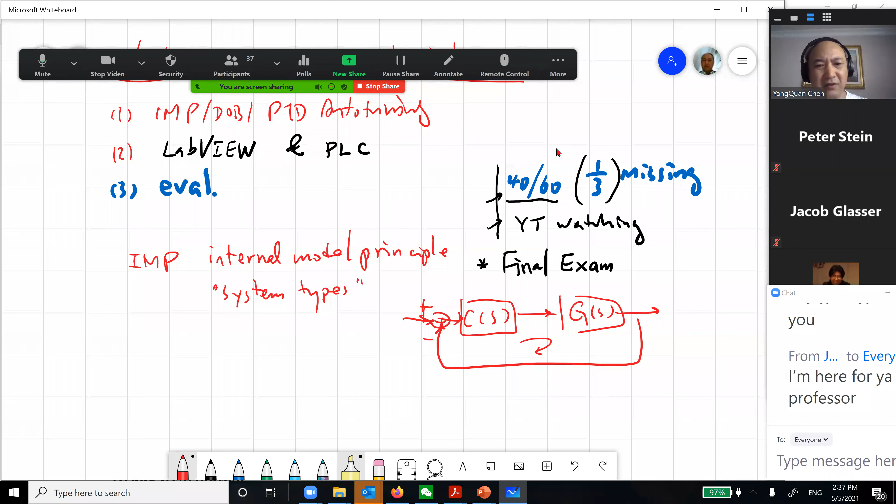So if I don't have an integrator inside here, the transfer function in this loop - the loop transfer function is C times G - then I can write a numerator and a denominator. If the denominator doesn't have an S, then when you have a step input, you have a response, so you have an error here. This is your error steady state, the error when t goes to infinity - it will not be 0 if you don't have this.

So this is called system types - system type, so like S to the power of r. So r equals 0 is type 0, r equals 1 is type 1.

Type 1 means you have an integrator within the loop. When you have an integrator in the loop, the steady state error will be 0 for sure. That's called the system type principle. This is only for a step signal, and this is because you have S in here, so you need a type in here.

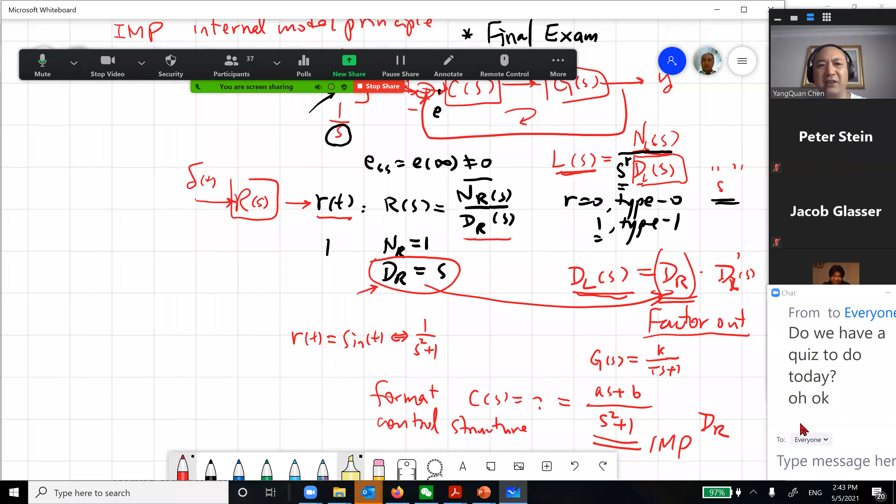So we did the first one, and now I'm going to talk about DOB. You have learned this before, there's a week 11 lecture recorded, I only did a 45 minute talk. We talked about 3 things in that lecture: one is IMP, and Youla parameterization.

And we talked about Smith's predictor, right? In the Smith's predictor part, we did CGE minus LS and 1 plus CGE minus LS. We figured out a magic way to simply pull out this thing, so the delay will not affect my stability anymore.

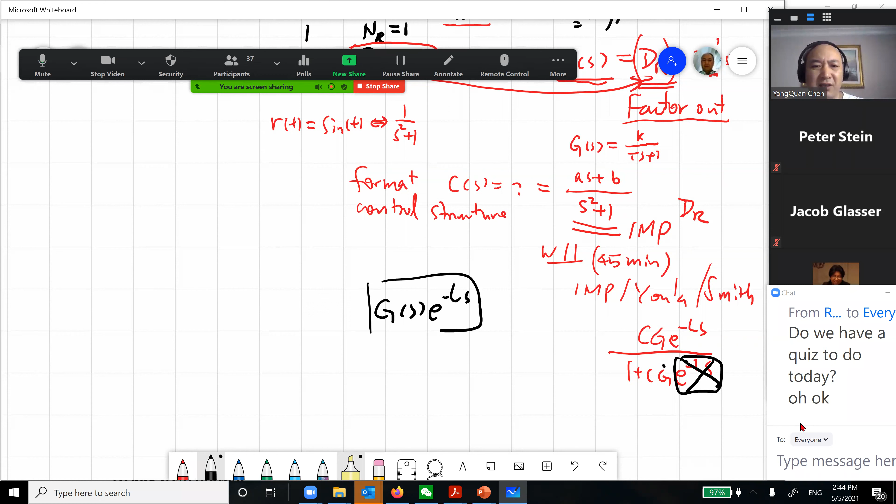So the transfer function, it's like you have G in here, you have minus S in here, and you have a controller in here. So if you do this feedback control, then your closed loop system is CGE, this one and this one, right?

No question about it. The Smith predictor is to give you an idea, say, let's do this way. So then you have G of S, here you have 1 minus E minus LS. You do this way, and you do this one, it's minus. So this is a Smith predictor. By doing this kind of feedback, the closed loop system will only be like CG over 1 plus CG times E minus LS.

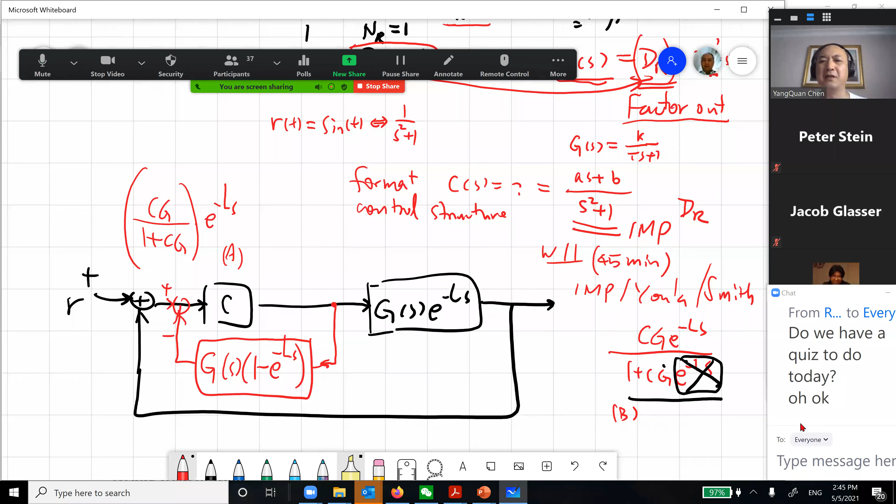Isn't this like magic? Compare this B versus A, it's different, right? So that's the beautiful side of Smith's predictor.

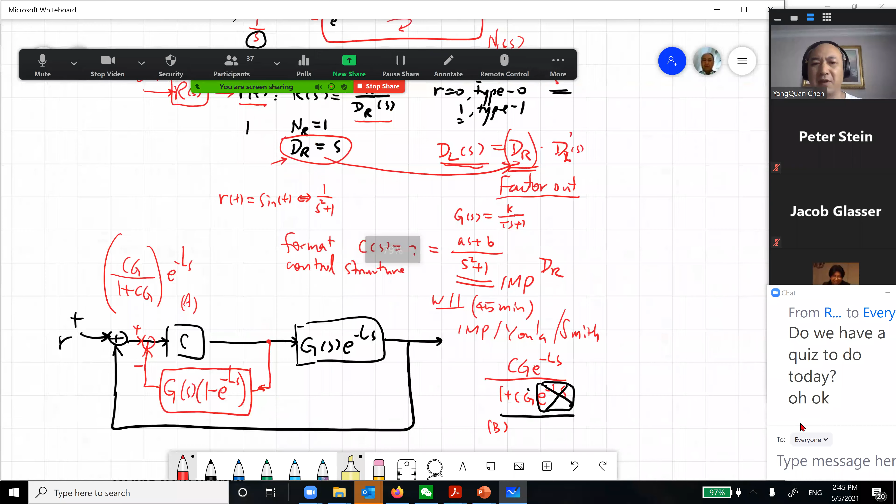So the reason why we call it Smith's predictor is from a physics point of view, Y is measurable. So U is available, Y is measurable. So G E to the minus LS times U is Y, this is all physically available signals. However, G of S times U, this is U, then you have GS times U, that is actually Y E to the LS.

LS is future, minus LS is past, it's delay. So how is this physically possible? That's why we call this predictive: you measure the Y, and then do a prediction. You get this Y, you need to predict what is T plus L. So that's why it's predictive control. In this expression, G e^(-LS) times U is Y, and this is measurable, but G times U is not measurable, it's by prediction. That's why it's called predictive control.

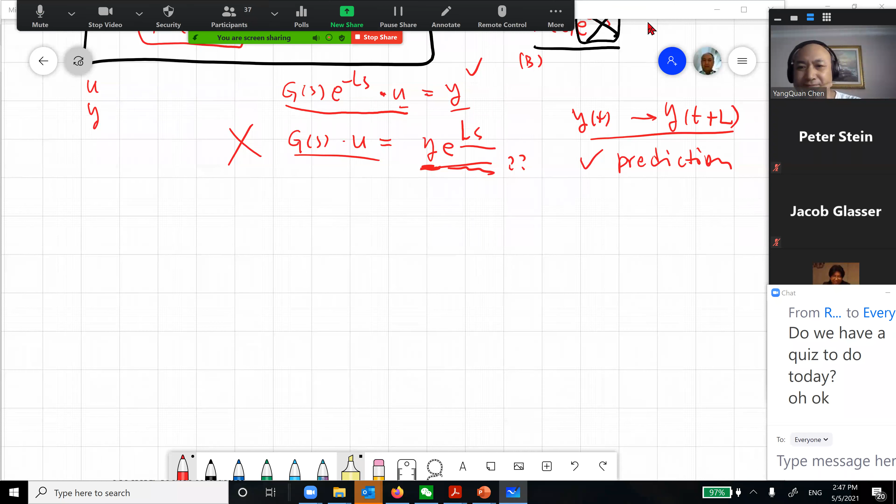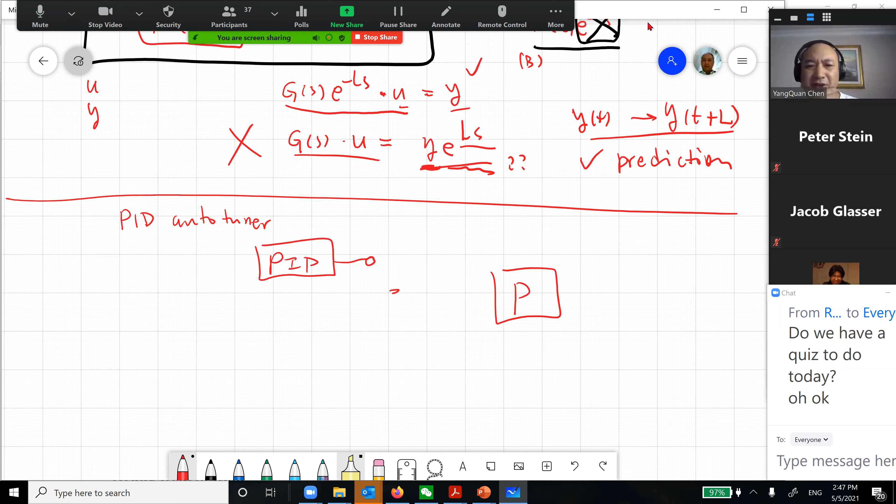So I'm going to do a PID Autotuner. Basically you have a PID control, you have a plant, you have a PID control, you want to do PID control. So you have something here, you do this, you do this, you do this.

So this is traditional PID control, but from time to time you probably say, oh, I need to do retuning of the PID. How do I do that? What they do is they put a relay element in here. You turn the switch here to here, so this is switched to here, then you have a feedback. This is called a relay feedback experiment.

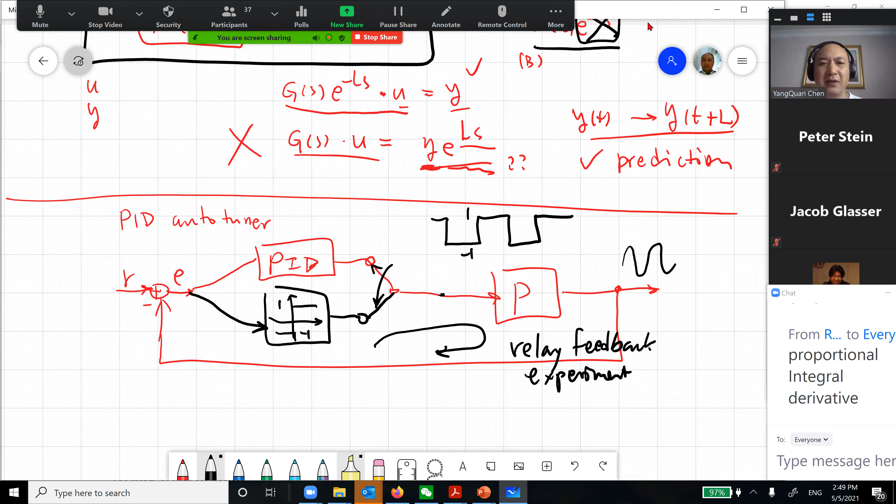By doing that, you are going to see your output will have oscillation, while the input here is like a square wave, only one or minus one. So then you can measure what is the PU, the ultimate period. You can measure the ratio between the output here divided by 2. So this is peak-to-peak amplitude, A divided by 2. This, 1 minus 1, is 2, so the magnitude is 2, and this magnitude is A. A divided by 2 is the ratio.

So with this ratio, with this PU, you are going to use the Ziegler-Nichols tuning table to decide your K, TI, and TD. Again, the PID, when we say PID, we should use this one: it's K overall, times E, plus 1 over TI times the integral of E dt, plus TD times dE/dt.

So why is this always true? Because this is time, so overall this has the unit like E. This dE/dt has time divided by time, so this is still E. Unit E, so add all this unit E together, then you multiply by K. That's why you use this form in industry all the time. But in the textbook, many people say, oh, I do KP*E, KI times integration of E, and KD times E dot. Is this okay? Yes, it's okay, you can interchange it. But in that case, this KD, KI should have units, and in the other form this one can be unitless, but this one will carry different units. Otherwise you cannot just add variables with different physical units together.

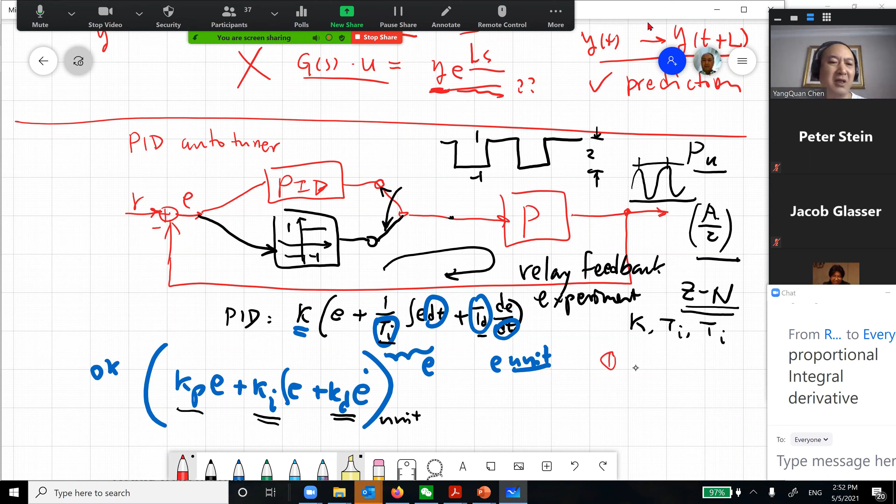But how do you decide all these parameters? You're using Ziegler-Nichols. Using Ziegler-Nichols is based on what information? So we did two methods: one is called a reaction curve, also known as Cohen-Coon, and another one is called ultimate oscillation.

This means you do a proportional feedback control and push the gain to a point where the system will start to oscillate, and that will damage the system. So you use relay feedback instead, so your input signal is always limited like this, so you're not going to damage the system. The system will have oscillation, but be careful, you need the formula to convert this to the ultimate gain. I think we covered this part already. So this is like a second method, called the relay feedback experiment.

Because the relay feedback experiment is safe and widely used in industry, it can be configured inside the controller. You have different modes: a tuning mode and an operational mode. So if you feel the system is not functioning satisfactorily, fine, let's switch to here and let it run, then we can automatically check and retune the PID.

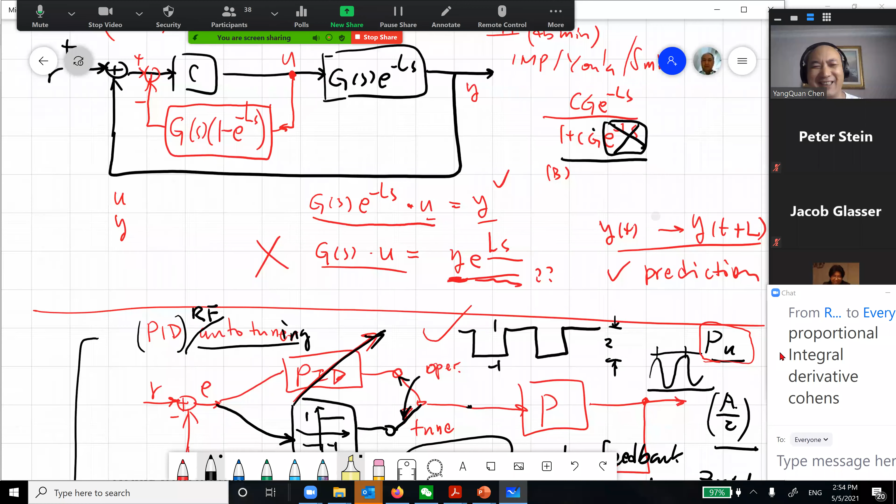So here's the DOB. Actually, if you go to industry, you are going to see this idea a lot. Let me give you an example. So you have a plant in here.

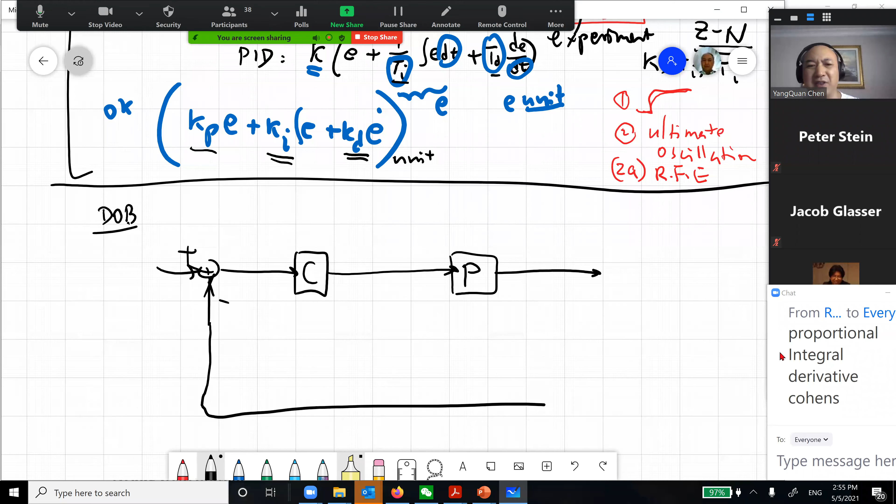And you have a controller, okay. Yes, everything is running, but sometimes you start to see something - this is a disturbance. This D will make your system very bad. So how can I cancel out this D?

One of the ideas is you buy a sensor here, measure it, go through some sort of filter, then you add in here, or adding here. You add in here, that's physically connected. Then hopefully you can cancel it.

But this one needs extra money to measure it. And most importantly, even if you have money to buy a sensor, in reality there's no way you can put it in to measure it. So you cannot - it's not possible to measure. It's not just a matter of money.

Suppose you cannot do anything here - this takes money, and also physics will not allow it. So what are you going to do? You still have this one here. Say for example, you have a

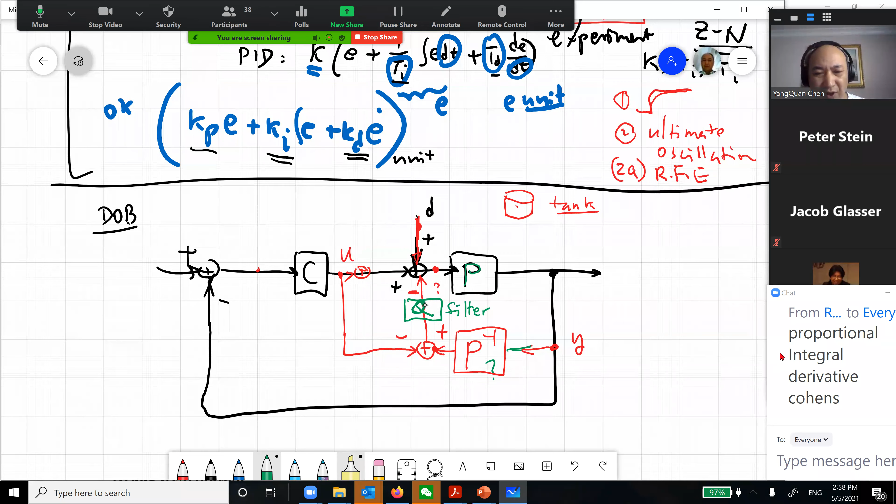But remember, if you put Q in here, it's the same as you put Q in, like this. So you have C in here, you have D in here, you have P in here. So what I'm trying to say is you have U in here, you go to Q, you also go to a Q.

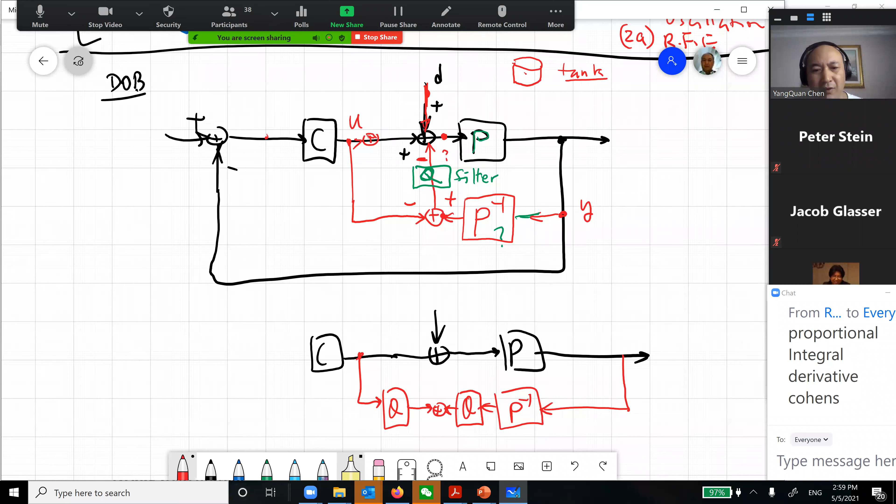So then this is D hat, this is D, they can minus it. It's the same - you have a Q in here, you can push the Q inside. So you should have a Q in here and a Q in here, right? It's the same.

But this is more realistic because you have a control signal that goes through a low pass filter here. Say for example, it's 1 over tau s plus 1. So you get this signal. This is totally reasonable - you filter this signal, right?

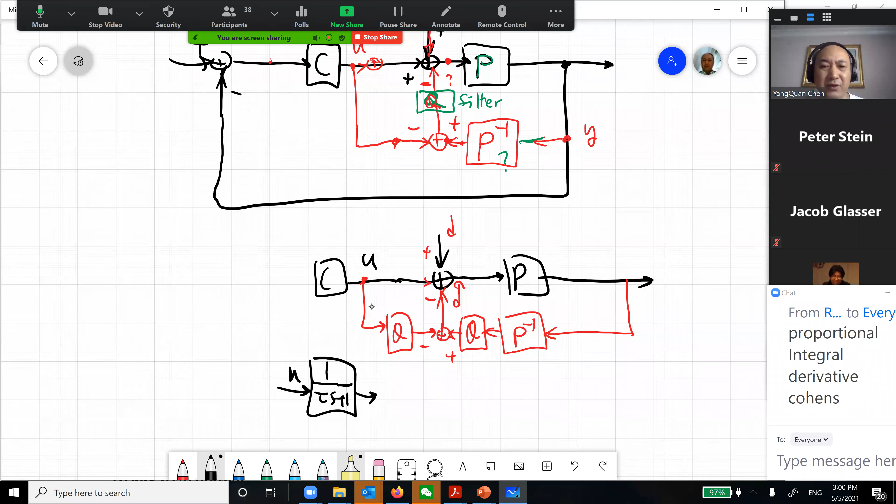But this is dangerous. This is kind of like a bare - bare differentiator.

Okay, differentiator, we don't like it. This is relative degree -1. This is not desirable. So if I put tau s plus 1 and multiply by this one,

then this is realizable. And if needed, I can put a different relative degree here, so my rolling off is faster. This is 1, this is 2, right? So squared, you have faster rolling off for the Bode plot.

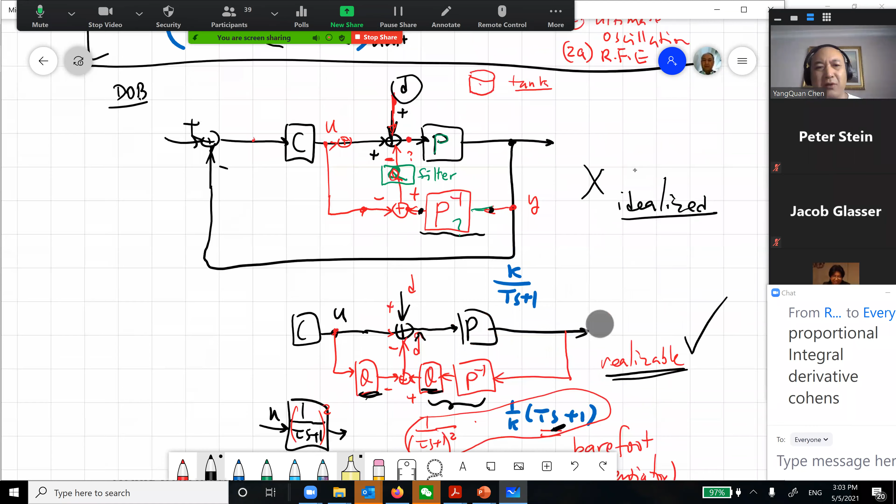This is actually widely used in industry. So going back to the beginning of our plan for today: IMP, DOB, and PID tuning.

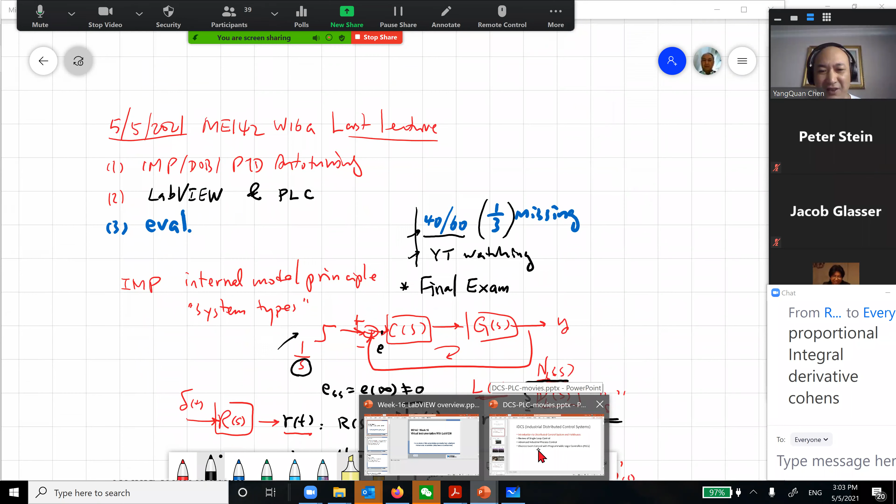Next I'm going to do LabVIEW and PLC. It's actually much easier, we just watch movies. So let me do LabVIEW for you. I think I don't even have to go through LabVIEW with you because you know Simulink.

Oh, I got 39 students in the class. I'm very happy.

All right, so I'm going to go quickly, give you some psychological preparation, so at least you can tell yourself, yeah, we briefly covered this in class. So yes, LabVIEW is NI's product. We can go through this one for about half hour, but let's try to go faster.

Okay, so the basic idea is instruments, okay, instruments. VI stands for virtual instruments, VIs. So you know that we explained in the previous sensor part regarding the sensing mechanism: you have sensing mechanism, signal transmission, then finally you have a display, you present it or store it.

All these things now can be virtualized. You don't even need to build the real instrument, you can just do it on the screen. But of course, AD, DA - so analog signal, you have to convert to digital signal. And you have digital signal, how you can sample it in DI.

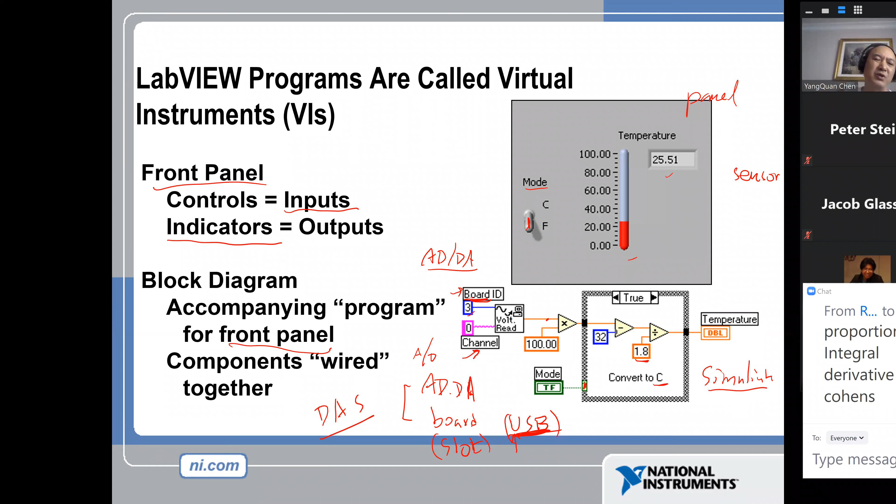So this is a board called signal acquisition. Inside here you can preset which signal is connected to the board via which channel. Then you have a signal manipulation block and a presentation block. This should remind you of our basic signal sensing framework: instrumentation. Before signal acquisition, you need a sensing mechanism that turns the physical quantity into a voltage signal you can sample.

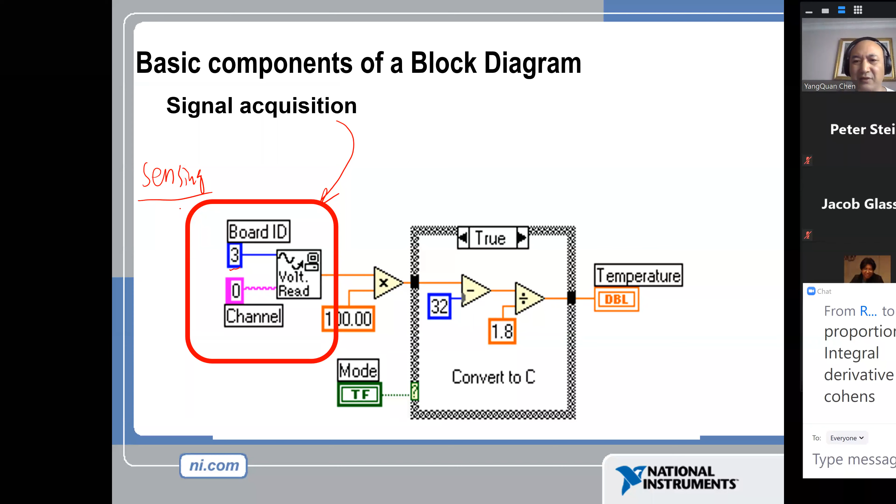Then presentation—the user looks at this panel. The front panel also sends control data, like true or false, a toggle between C or F. By doing that, you can use different modes. This is called DI, digital input—the yes or no, 1 or 0 input. There are a lot of things similar to Simulink.

It uses different libraries for operations, and you can also put a waveform graph into this. You can do stop, start, integrate, and display temperature. You can use another display like a waveform graph. There's a panel toolbar—all these things are already built in for you to construct a nicer, specific interface.

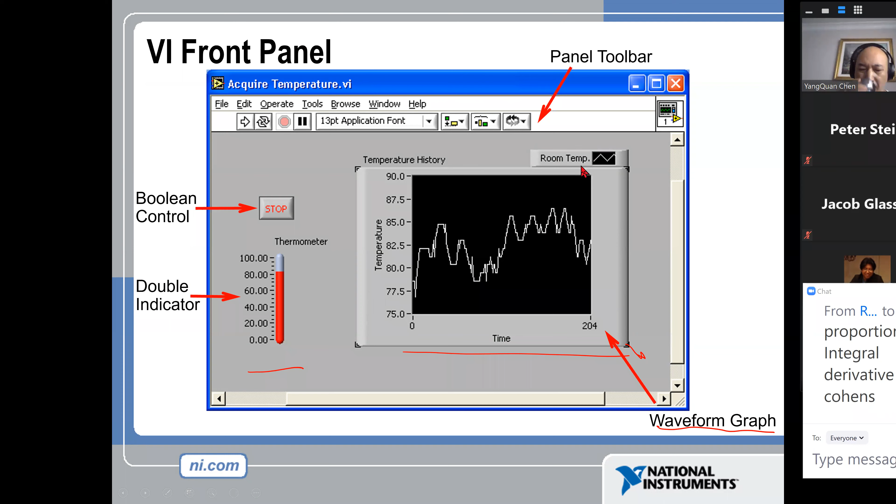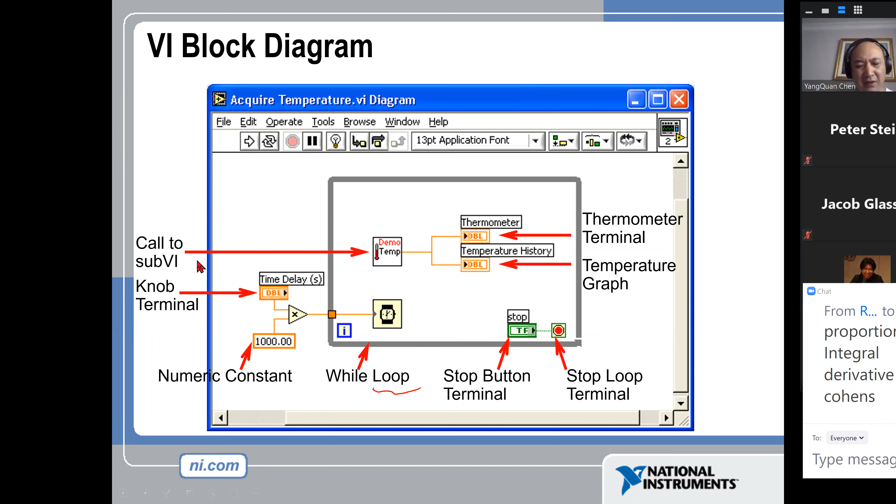You can even include a while loop inside, with a stop loop button and so on. You can also create a subroutine called sub-VI. There are a lot of concepts parallel to Simulink—like masked subsystems. And these are the palettes, a library of controls and functions of different types.

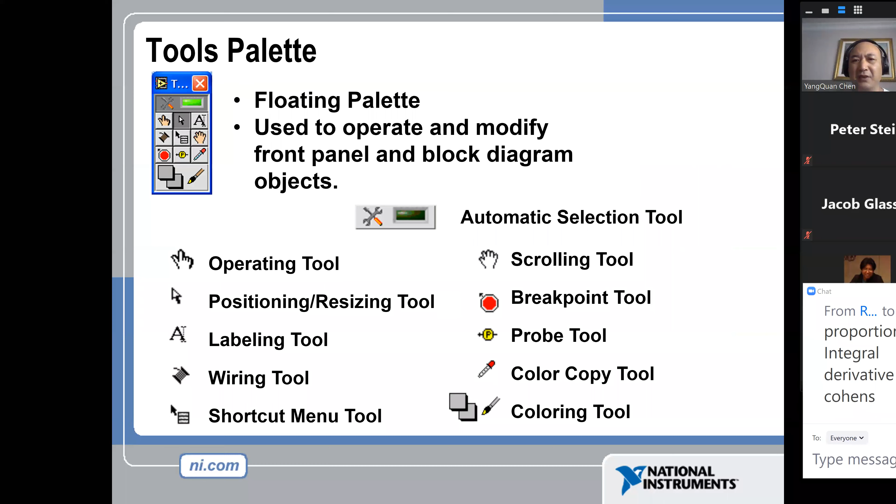I don't want to go through all that—these are the status toolbar, how to do the programming, and so on. It is actually very interesting.

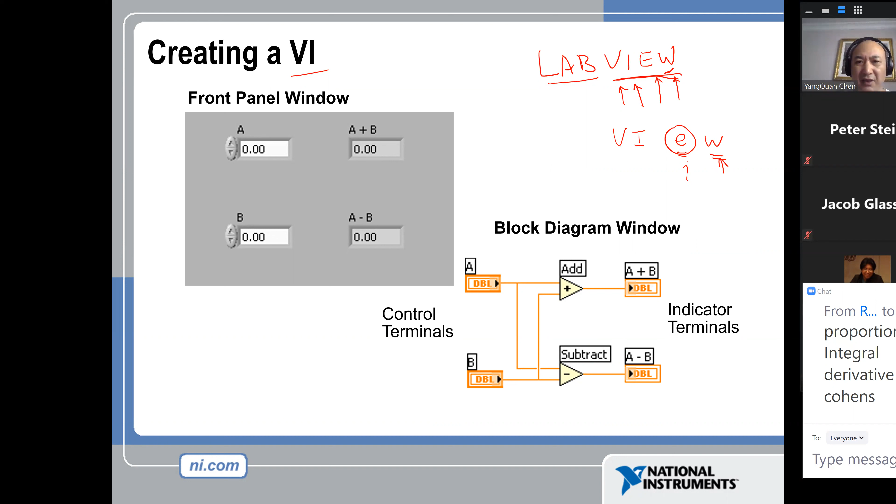In fact, LabVIEW is not just a view; it's a virtual instrument—the V and W stand for, I remember, this is a workbench. What is the E? I need to find out—virtual instrument, experiment workbench, maybe. This is similar to the Simulink wire connection. So why would they do that?

They can use this to mimic some commercial panels—if you buy an oscilloscope, there's a panel, and they have that too. The sub-VI concept looks complex but isn't too important; you can reuse those sub-VIs, and many of them are probably already presented to you.

You have a panel—like a VI, virtual instrument panel. Together it forms a path from sensor to visualization. That's why it's called virtual instrumentation.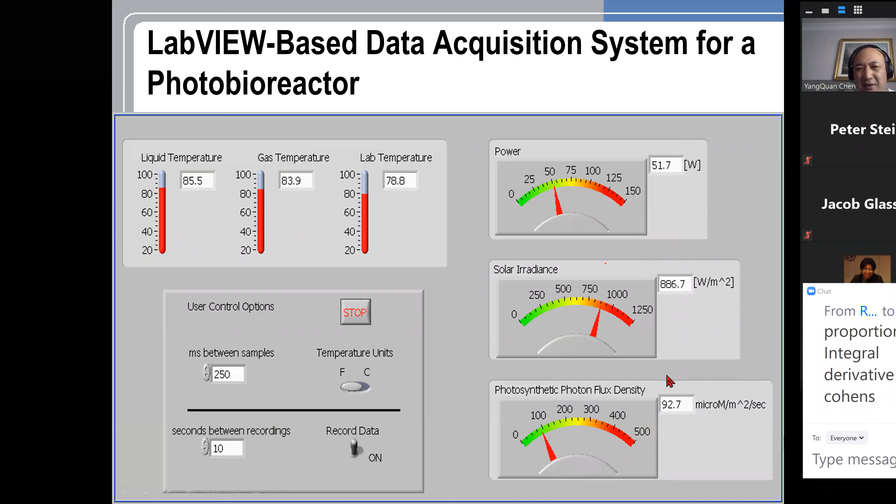I hope you see that inside here, you can keep these photobioreactors always under control, because everything can be sampled and displayed so you can see whether they are in a safe or unsafe region. So you monitor all the real-time data—temperature, and so on.

Okay, so where do I go from here? I would like to say, if you are given a VI project and asked to do it, you should have 100% confidence to say yes, I can do it. Just spend time reading the menu and play around to get familiarized with LabVIEW. I think this digital twin last project is helping you gain that confidence.

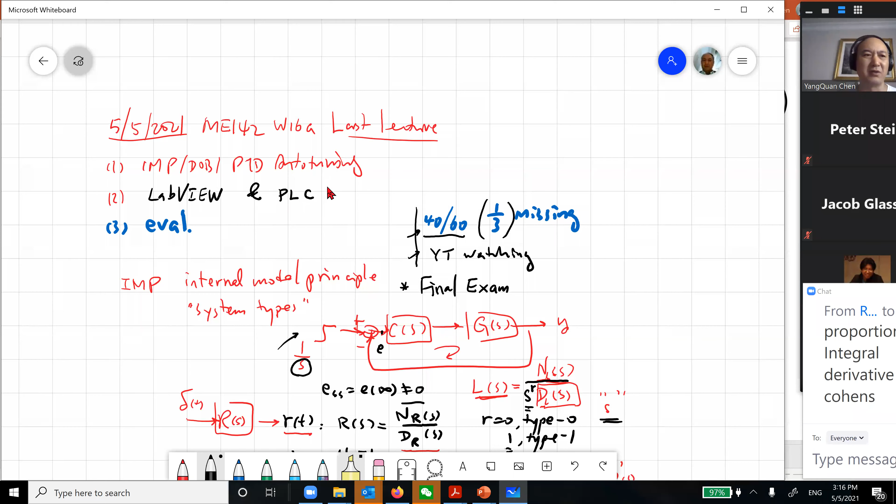Okay, so I'm going to finish this part. Our timing is great. What I'm going to do next is regarding what I'm planning to do, LabVIEW and Programmable Logic Control, PLC, in the industry setting. I hope that, because the plants are in different places, you usually hope to make a central monitoring room to do that. So let's go through and watch some of the distributed control systems and programmable logic control movies, then get familiarized with that.

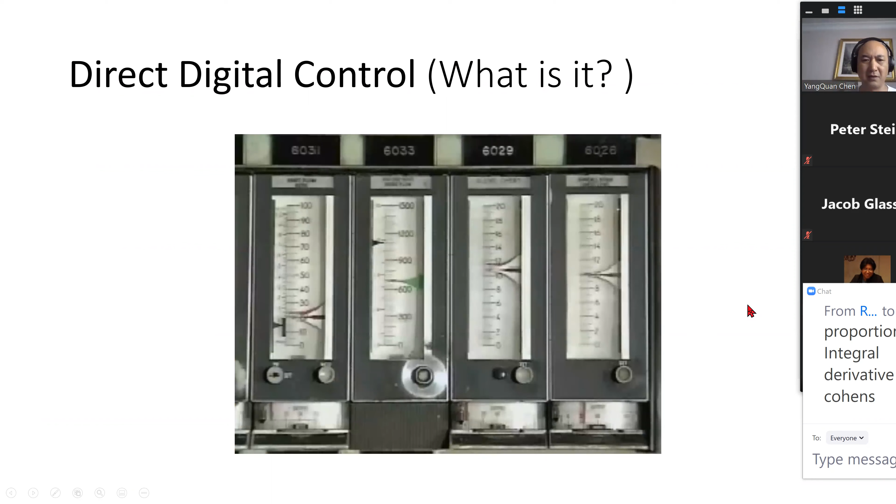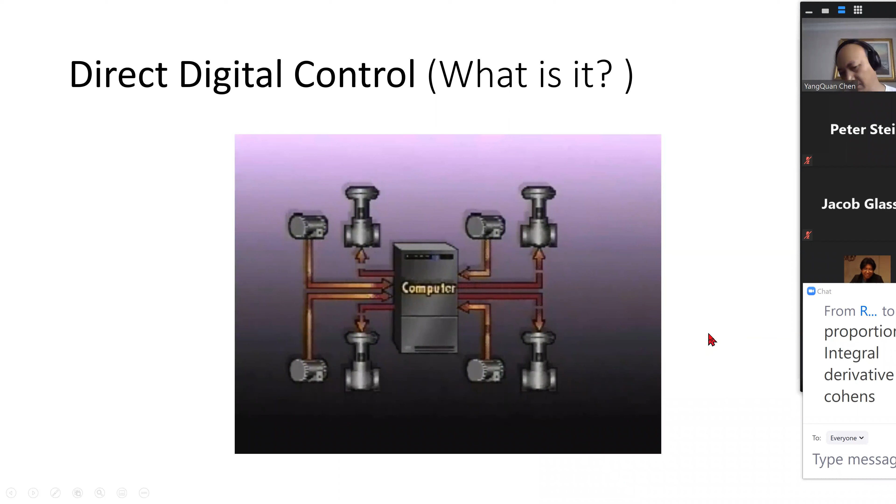The earliest form of computer-based control was called Direct Digital Control, or DDC. Early DDC replaced standalone controllers with a central computer. All measured process variables were sent to the computer, which was programmed to carry out all process control tasks. This centralized control function made communications between loops possible. Unfortunately, relying on a centralized computer had a major disadvantage: a computer malfunction could cause the entire system to go down, necessitating expensive redundant computers or a backup control system.

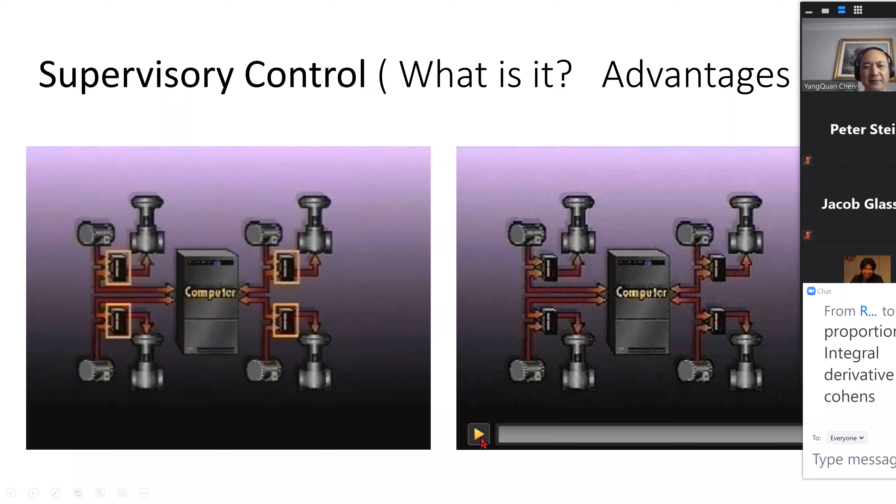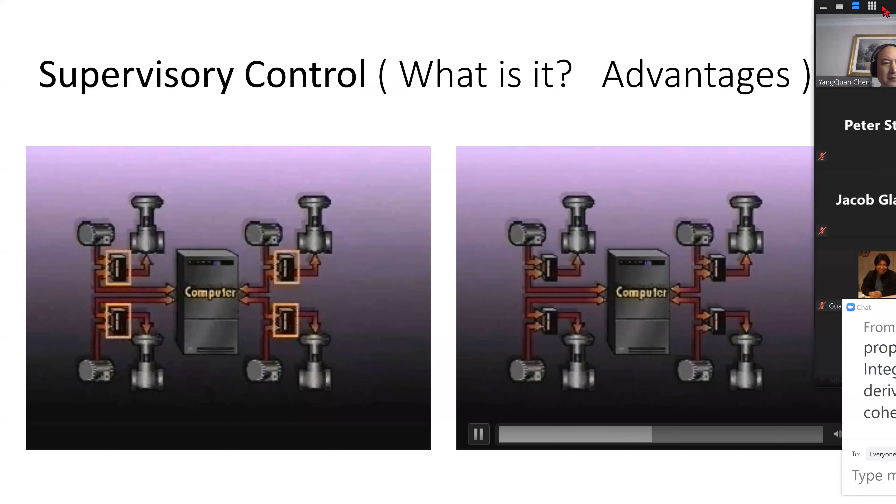The earliest form of supervisory or setpoint control combined the advantages of single loop and direct digital control. Like direct digital control, supervisory control was structured around a central computer. The central computer generated controller setpoints for the individual loop controllers. However, all final control actions were carried out by the local controllers. Supervisory control incorporates the advantages of DDC, but is more reliable because the control functions are contained in individual loop controllers. Supervisory control systems can still be found in some facilities.

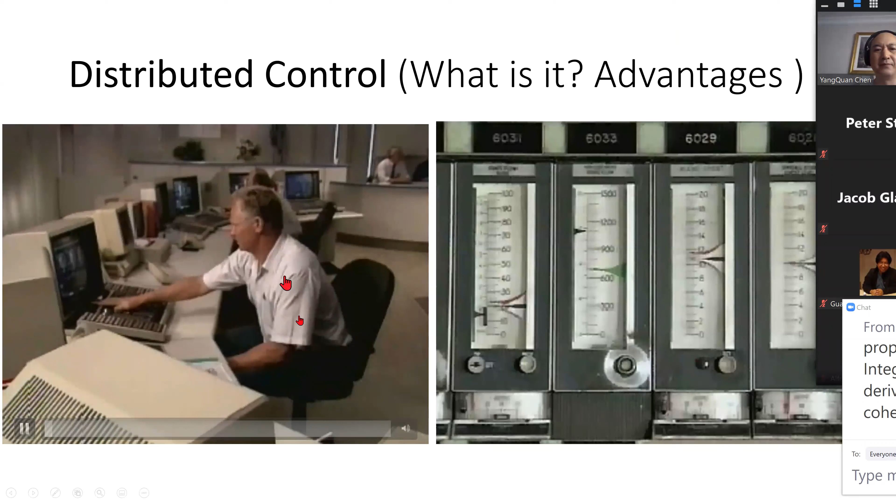Supervisory or setpoint control. The development of distributed control systems, or DCS, was made possible by solid-state electronics, electronic circuit miniaturization, high-resolution displays, and data communication. A modern DCS is a collection of microprocessor-based modules that work together through a real-time communication system to control and monitor the process operation. The DCS carries out rapid communications between modules via a data highway. It receives signals from field devices and uses them to control loops, execute special programmed logic, monitor inputs, alarm plant operations, and trend, log, and report data.

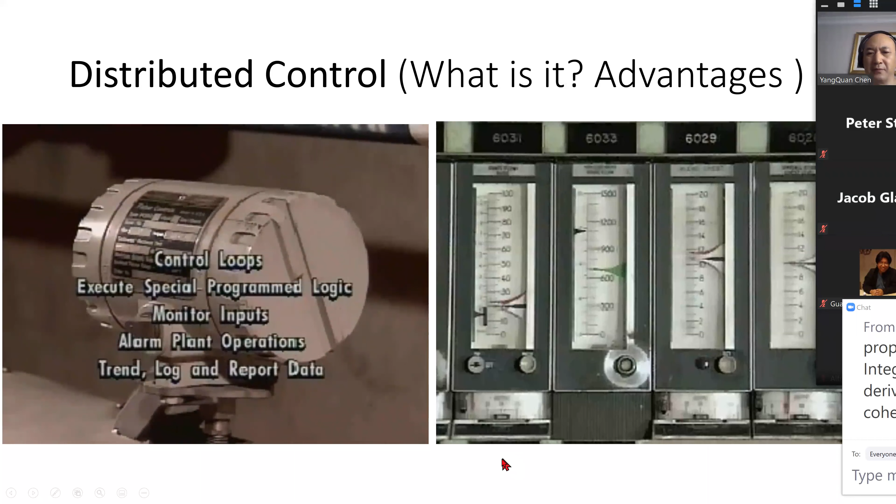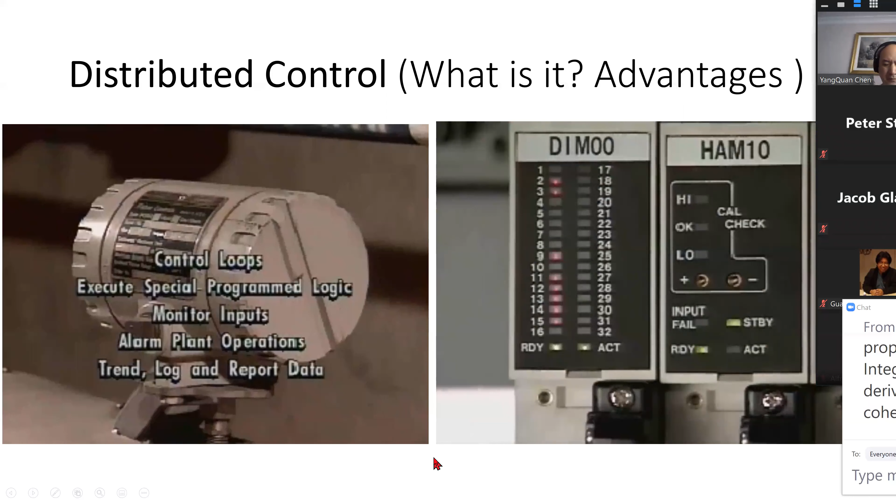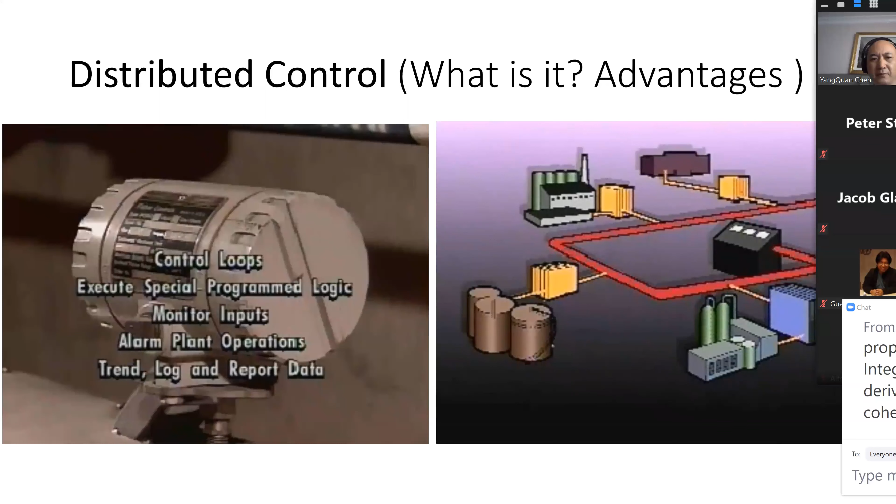DCS combines the reliability of standalone control with the computerized capabilities of DDC. Each DCS module is a microcomputer dedicated to specific functions. Process control may be distributed both geographically and functionally, and control subsystems are only responsible for controlling a portion of the entire process. One advantage is that if a control subsystem fails, the only loops directly affected are those controlled by that individual subsystem. The rest of the process will remain under control, preventing any loss of distributed control. So that gives you an idea of DCS.

So the Mechatronics system is only part of the larger distributed control systems, okay? And they are connected through the field buses. So let's go to...

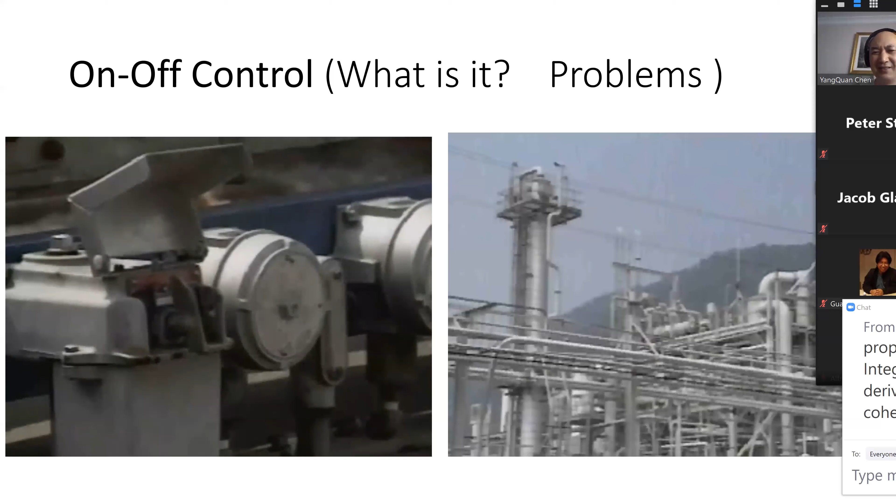On-off control is a basic form of industrial process control. With on-off control, the final control element has two positions. Let's take a look at how on-off control can be used to control the level of liquid in this tank. Fluid is constantly being fed into the tank. The set point is 50%. If the level falls below 50%, the valve closes to raise the level in the tank. If the level rises above 50%, the valve opens and processed fluid is discharged from the tank. In this system, the final control element, the valve, has two positions: fully open and fully closed.

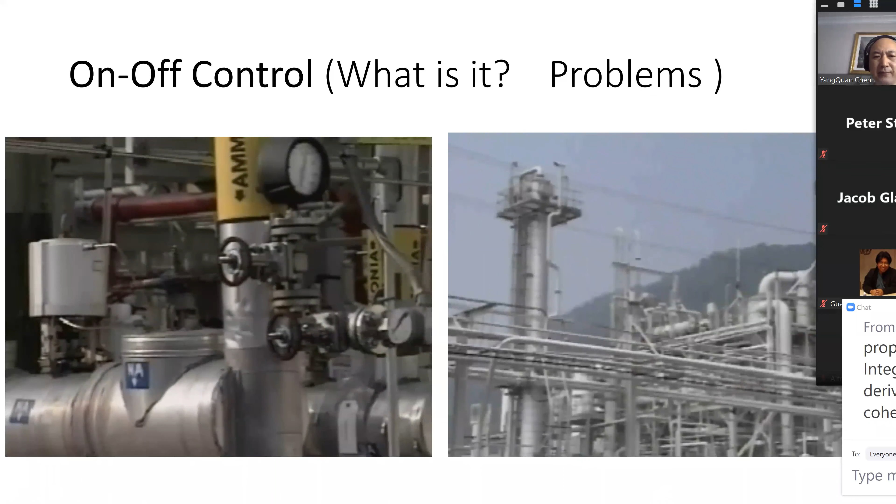Since on-off control usually results in oscillation, it is only used in processes that can tolerate deviation of the controlled variable from the set point. On-off controllers may also have an adjustable dead zone or dead band. The dead zone is a range of values around the set point. No control action is taken if the system remains within that range. This helps prevent wear and tear on the equipment.

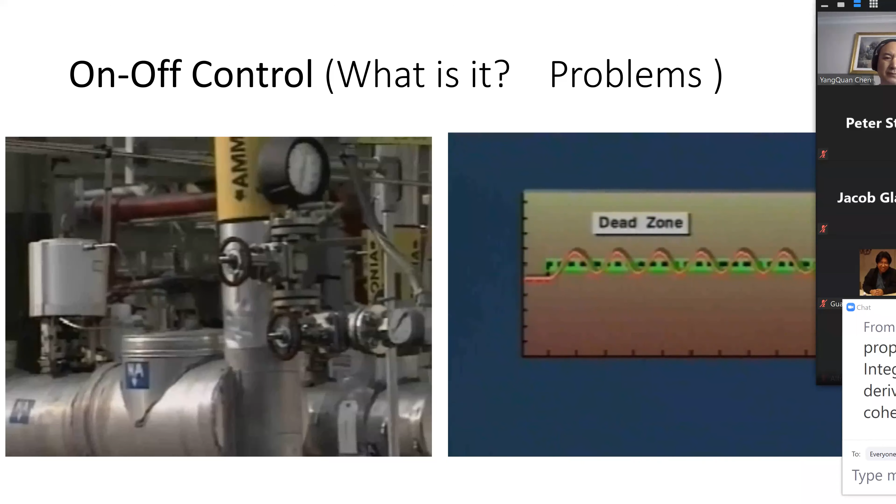Proportional control provides continuous control in a process that requires little or no deviation from set point. In a proportional control system, the output change is proportional to the input change. The output signal from the controller can position the final control element at any point between fully open and fully closed.

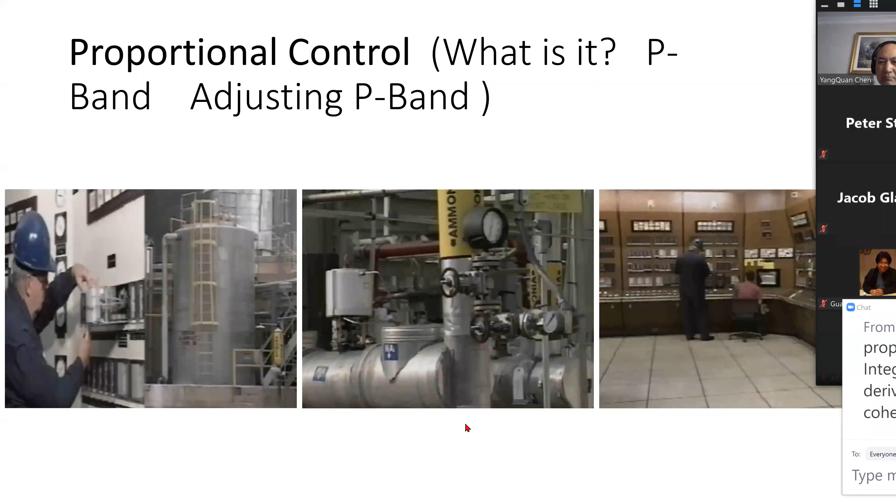Control action in a proportional loop can either be reverse or direct acting. In a direct acting control, as the input signal increases, the output of the controller increases. With reverse acting control, as the input signal increases, the output of the controller decreases.

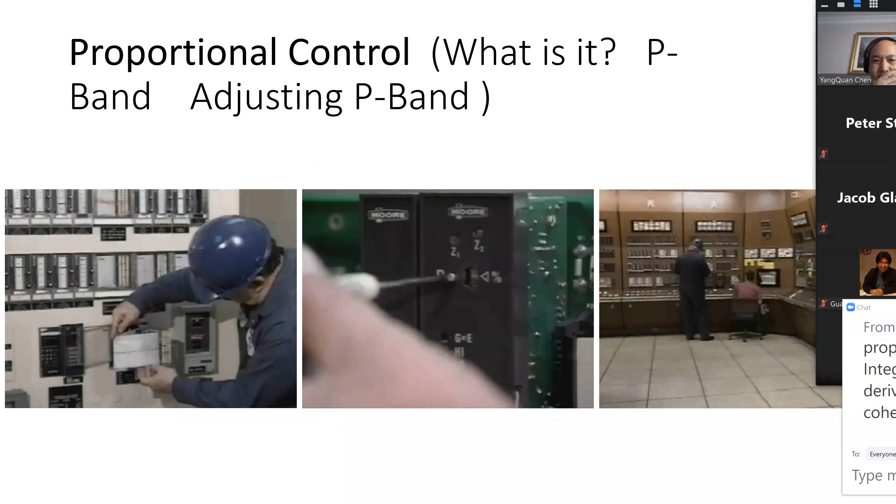Different processes have different process dynamics. Temperature is a process which has a slow response. Flow has a very rapid response. Controllers must be adjusted to compensate for process dynamics. This is done by adjusting the width of the proportional band. Proportional band determines the amount of input required to provide a full range of output.

Adjusting the proportional band on a controller to provide the proper response is necessary to stabilize system operation. For example, if a fast-responding process were controlled by a controller with a narrow proportional band, the process could become unstable, resulting in oscillations. Likewise, a slow-responding process controlled by a controller with a wide proportional band could result in sluggish system response.

Proportional control.

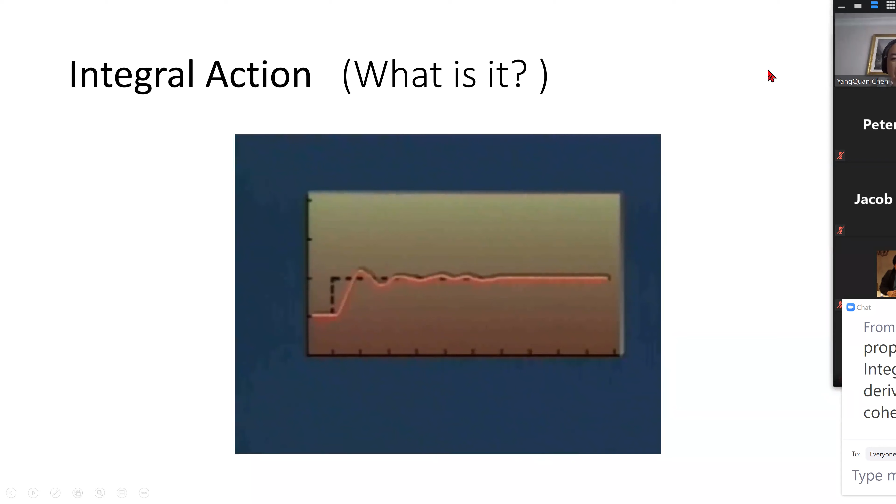Integral or reset action is added to proportional control to eliminate offset and return the process to set point. Integral action repeats the proportional output over time. As long as the offset exists, the integral unit will continue to act on the controller's output. Therefore, the integral action responds not only to the magnitude of the offset, but also to the duration of the offset. Units of integral control may be expressed in repeats per minute, often abbreviated REP, or minutes per repeat, often abbreviated MIN.

Although integral control can overcome offset, often a load change will cause the controlled variable to rise above or below acceptable limits before the final control element can be adjusted enough to make corrections. In this case, derivative action may be added.

The derivative action senses how quickly the process variable is moving away from set point and anticipates the overshoots based on the rate of change. Derivative or rate action will immediately add to the controller's output signal to minimize overshoots. Derivative action is most often used when rapid response of the controller is required.

So there are advanced controls, including feedforward. After that, we look at the PLC, okay?

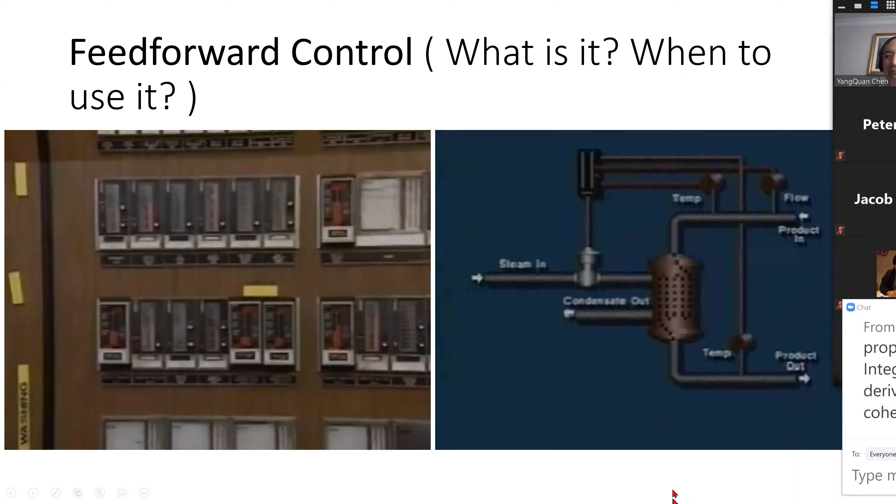Because a feedforward system usually monitors several variables, it's programmed with a mathematical model that predicts how interaction between variables will affect the process. This model determines the proper amount of control action to maintain the controlled variable at a consistent value. Because of the difficulty in predicting exactly how these variables will affect the process, feedforward is seldom used alone. A feedback loop is usually added to the feedforward system to monitor the effect of the control actions on the controlled variable.

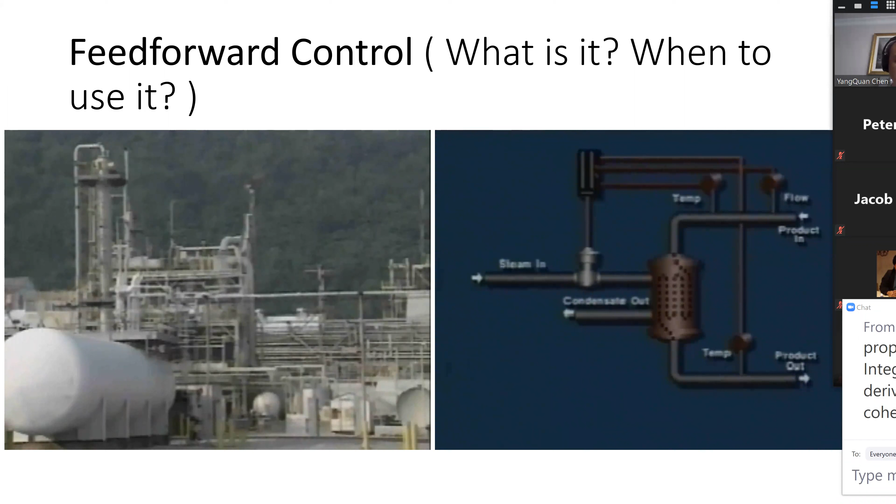As in any PID-controlled system, in a feed-forward system, the value of the controlled variable is determined by the set point. The response to a set point change in this system will be similar to that of a feedback-only control system. Feed-forward can be found in processes that are difficult to control, like boiler feed water, direct-fired heaters, and distillation columns.

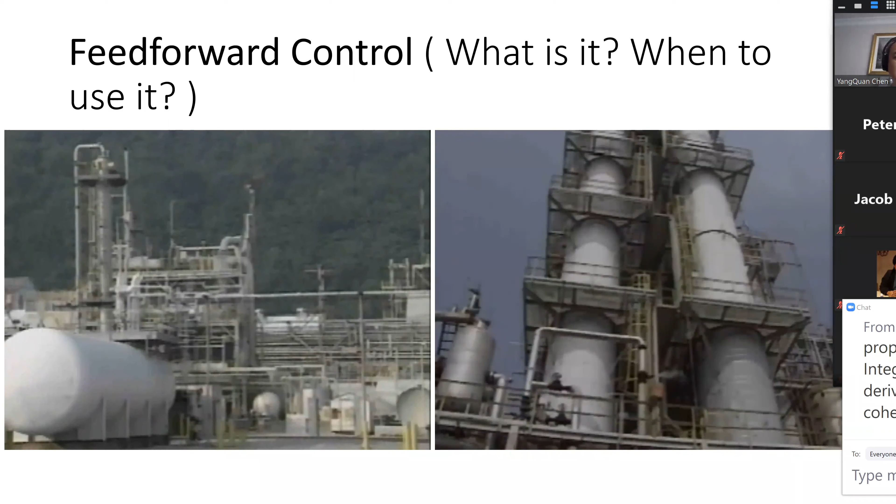Processes that require the blending of two continuous flows in precise amounts can use ratio control. A ratio control system monitors the rate of one flow and sets the rate of a second flow at a specific ratio to the first. For example, if the ratio selected was 2 to 1, represented on the controller as 1 to 0.5, the flow rate in line B would be equal to half of the flow rate in line A.

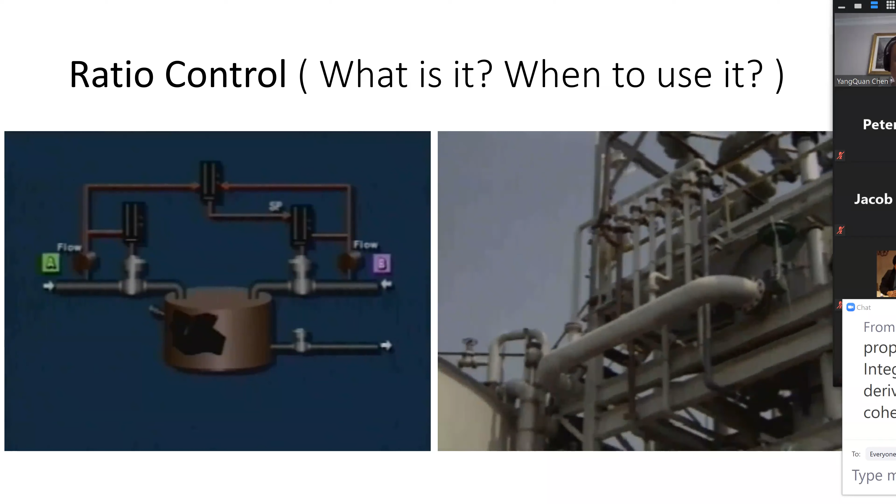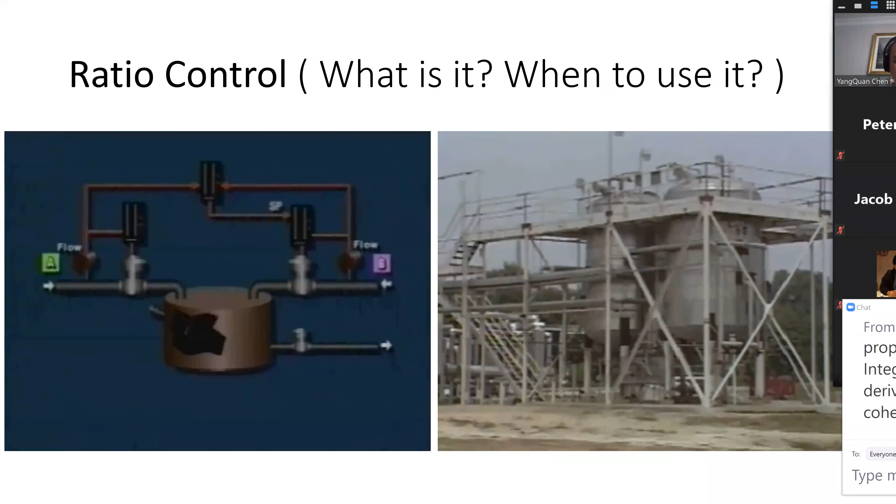A ratio control system is used in processes requiring the accurate blending of two or more continuous streams. A ratio control system is often used in batch reaction processes or to control the ratio of airflow to fuel in a boiler to ensure efficient operation. Ratio control can also be found blending ingredients in the food processing industry.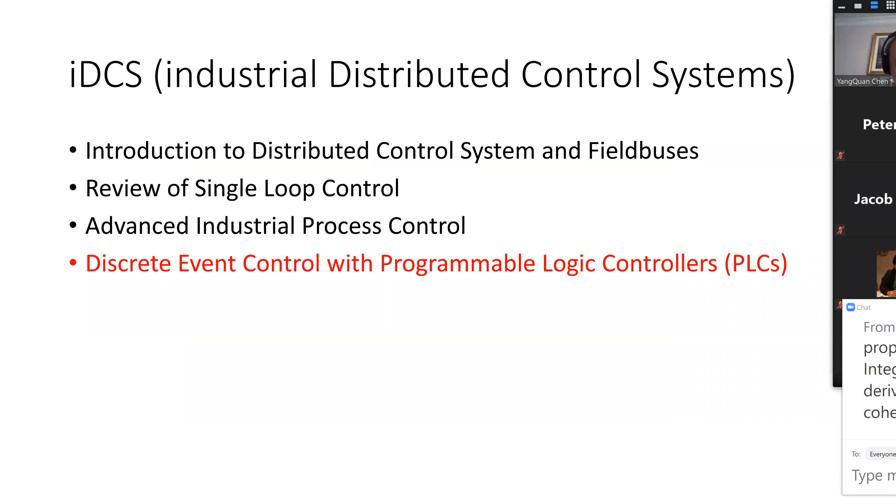Okay, here comes our core part regarding PLC. Most likely you are going to use it in the industry environment very often. So let's get some basic ideas.

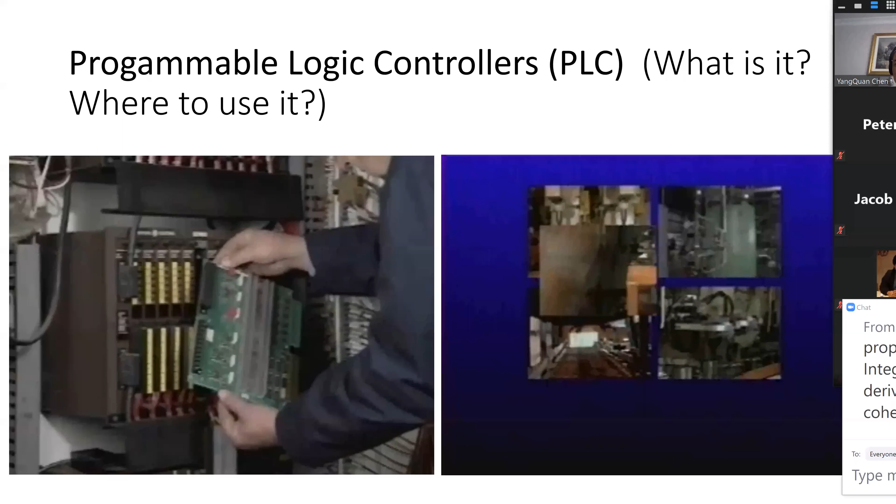Programmable controllers are industrial computers that can be used to control machines or processes. They perform functions once done by electromechanical devices. Because programmable controllers have fewer moving parts than hardwired systems, they improve efficiency and reduce maintenance. Programmable controllers, or PCs, are designed to withstand rugged industrial conditions. Because of their versatility, reliability, and efficiency, programmable controllers have become an industrial standard.

Programmable controllers are typically used in manufacturing to control automated machinery, such as this burnisher. Programmable controllers are ideally suited for machine control applications because they are reliable and cost-effective.

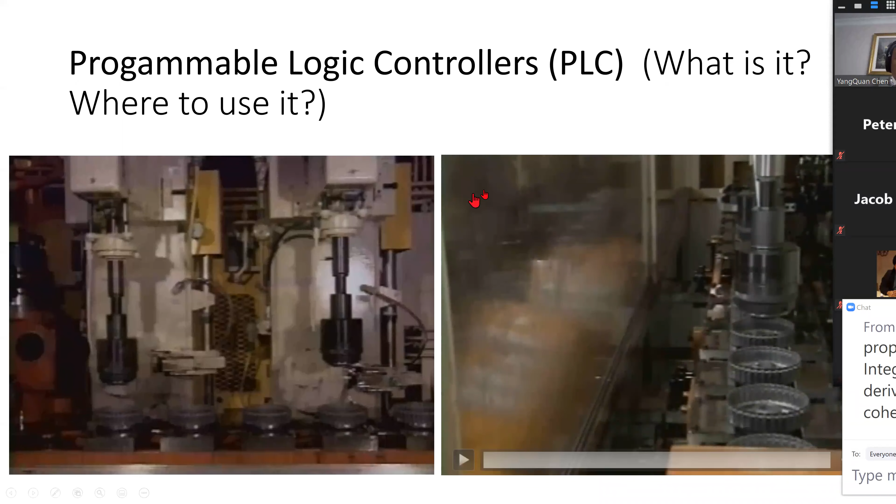Here's an example of a typical application of a programmable controller in a process. In this process, the PC controls valve sequencing, mixture operations, pump operations, recirculation, and tank temperature control.

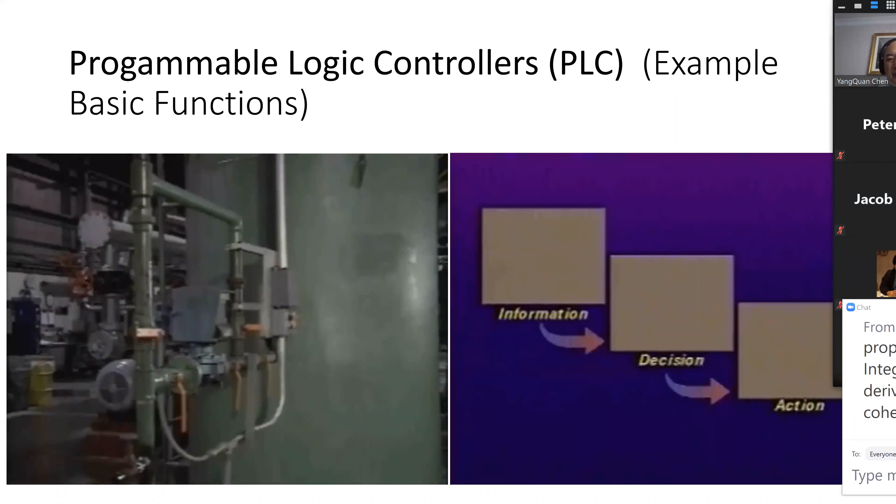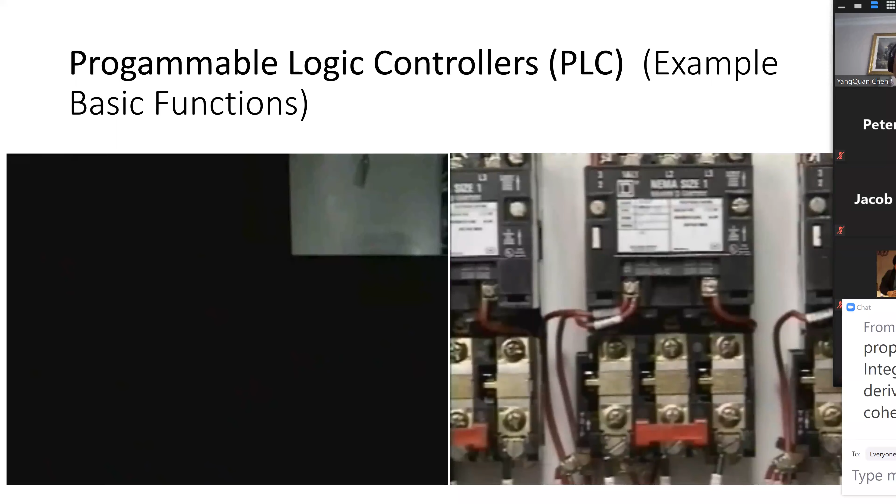Whatever the application, a PC system performs three basic functions. It receives information, makes decisions, and specifies actions to provide control. Field devices communicate the conditions in a controlled process to provide the PC with information. The PC compares the information with the instructions in its program to make control decisions. Other field devices convert an electrical signal into a mechanical motion. In this way, a PC's decisions become actions.

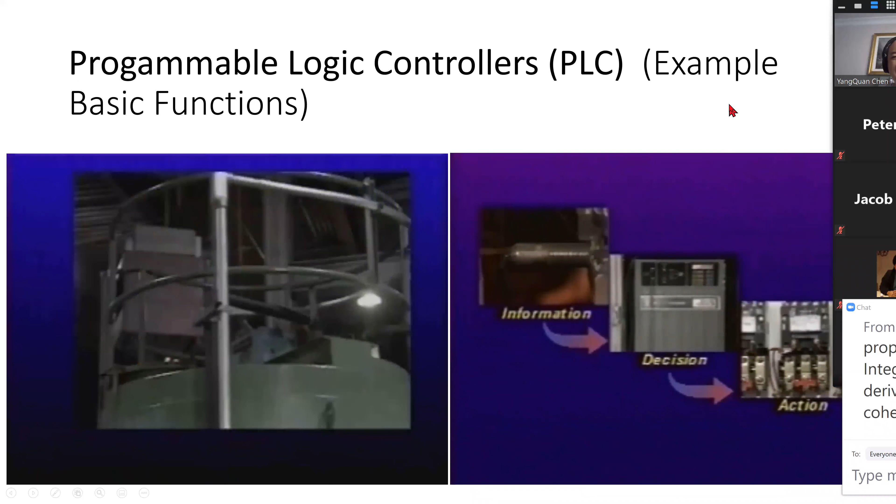Information, decision, and action functions in various PC systems are performed by similar basic components. However, the size and configuration of the system may change.

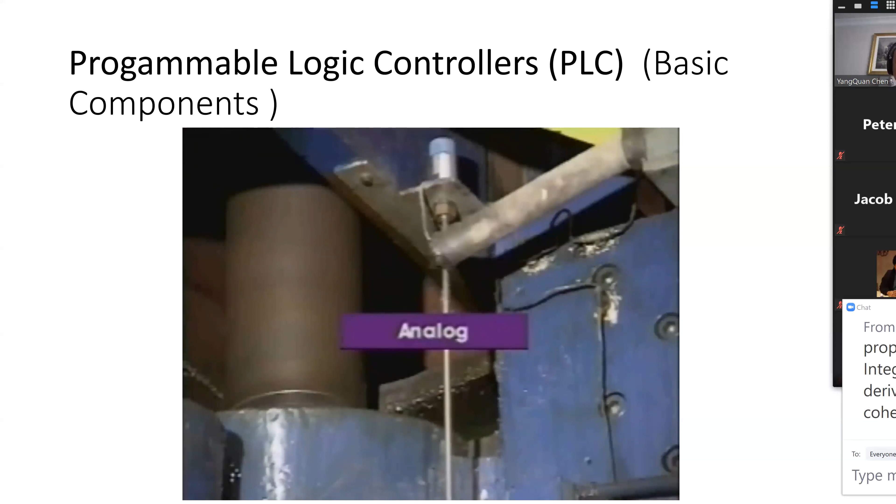Information about the process is provided to the PC by input devices. Examples of input devices include switches, push buttons, sensors, and thumb wheels. There are two basic types of input devices. Discrete input devices have two functional states: on or off, open or closed. Analog input devices, such as this position transducer, send signals which range in values.

A programmable controller, like any other computer, must be given specific software instructions to control machines or processes. The ladder logic of the user program provides this set of instructions for the PC. Because PCs originally replaced hardwired relay circuits, PC ladder logic was initially developed to resemble conventional relay logic. Even today, PC user programs use symbols that resemble relay logic symbols. A brief review of relay operation may help you understand PC software convention.

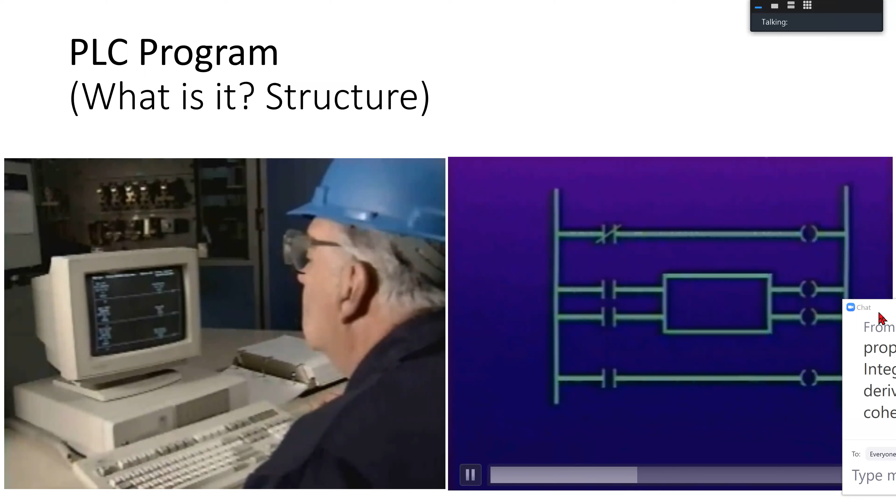A programmable controller uses software to perform control functions. You must have a working knowledge of the user program to troubleshoot control problems. As you can see, the structure of the user program resembles a ladder. That's why it's called ladder logic. Like a ladder, its basic structure is made up of rungs and rails.

Power rails are found on the left. Power flows left to right through rungs. Rungs originate from the power rails and are usually numbered from top to bottom. This allows for cross-referencing when troubleshooting within a program.

See two examples. This symbol represents normally open contacts. Contacts are used in the program to represent many different types of real-world input devices or internal outputs. The contacts are referenced to an address. When the referenced address goes high, normally open contacts will pass power.

This is the symbol that represents a normally closed contact. A normally closed contact symbol can represent a real-world input or an internal output. The contacts are referenced to an address. When the address they are referenced to goes low, normally closed contacts will pass power.

This is the symbol for an output in ladder logic. It's often referred to as a coil. The output can represent a real-world device such as a motor starter, or the output can be used to operate contacts in the ladder logic as an internal output.

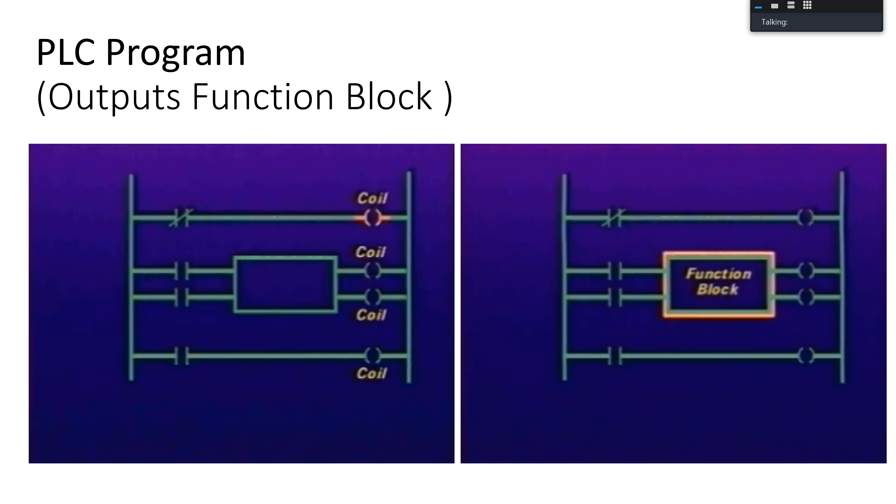So we watched all these industrial distributed control systems. I think you guys are ready to get into the real industrial environment. But we do have a lengthy, 12 pages long, programmable logic PLC lecture. That part I'm going to skip. We need to spend some time to do a review. We will continue this lecture after we finish this part. Any questions at this point?

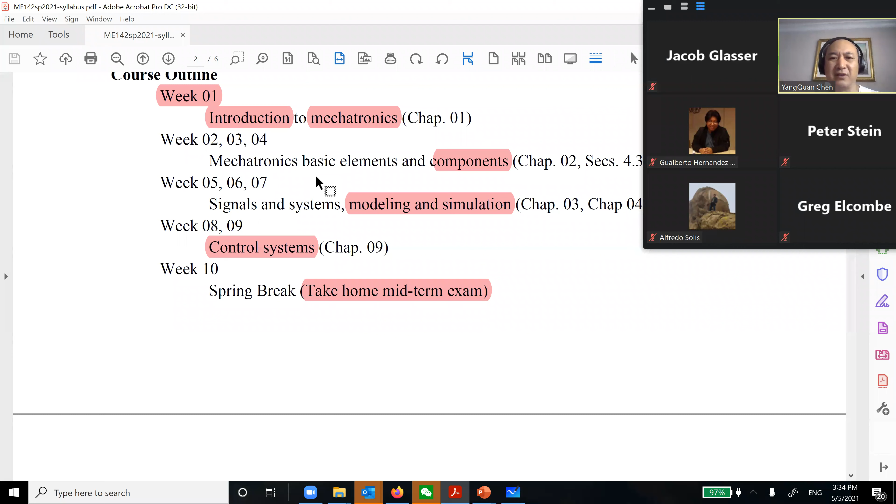Let me review what we have learned. We had the basic idea of mechatronics, talked about basic elements, generalized the components and their connections, and used linear graph to write down their equations. Especially in the components part, we put a lot of emphasis on op-amps.

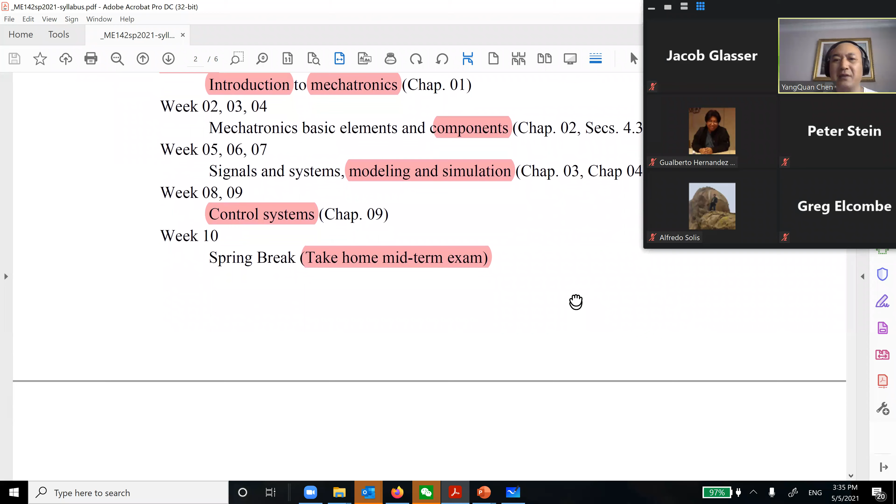After that, we picked up concepts on signal systems like Laplace transform, convolution, transfer function, and time frequency domain response, and doing modeling and simulation. In particular, we talked about something called realization. So you're given a transfer function, some op-amps, resistors, and capacitors, and you should be able to construct a simulator of this transfer function. Then in control systems, we talked about basics of stability, system types, steady state errors, Bode plots, and so on. In particular, we put PID control in here.

And then we spent time on the sampling process, sampling theorems, aliasing, Z-transform, initial value and final value theorem, and discrete equivalent design, and so on and so forth.

Then we talked about motion sensors, basic ideas of sensors, five different specs in the table for the sensors, and actuators as well. Then today we talk about these things.

So I've done the reviews, and what's next is something I want to show you here.